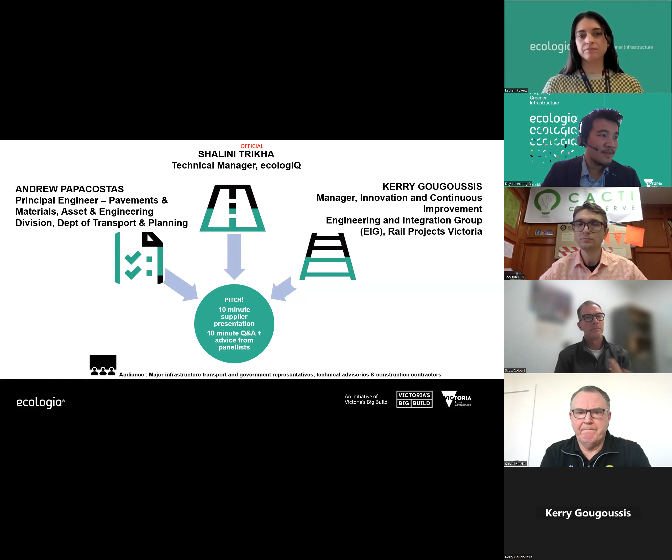Just before we get into it, I do want to take you through a bit of a whirlwind introduction to why we do what we do at ecologiQ, and it is because we're here to collaborate with you. I know out there in the audience I've got engineers, technical advisories, architects, people from local government, from transport projects, people from interstate departments as well. We see every opportunity, every project, every bit of road that gets built, every rail infrastructure that gets delivered as an opportunity and a catalyst for change. So we're here to work with you.

We've brought here today our industry and supply chain manufacturers, but with any asset owners out there, projects in delivery or in procurement or in design, we're here to partner with you and really challenge how construction is done so that we can bring about new innovation and new business as usual when it comes to building greener.

Some of the things that are possible have come through the showcase before. We've had a social enterprise called OC Connections manufacture Australia's first 100% recycled temporary T-top bollard. These you'll see on roadsides and at events providing traffic management. So you've now got a locally Australian, Victorian made bollard that's made from old bollards. They're quite price competitive. The feedback we're getting from procurement is that this comes in starting at $10.95 per bollard, or discounts if you purchase in bulk. It actually comes in cheaper than the regular imports. So for me, a no-brainer if you need traffic management, that is what you should be using.

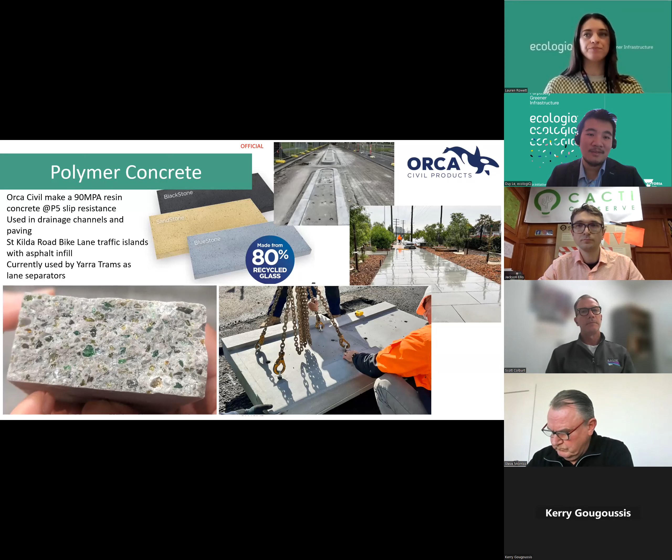We have high friction and high visibility surface treatments that not only provide safety benefits — you can see them in bike lanes and bus lanes — but also activate public spaces. So if you're around Melbourne and see a coloured, glinting glass surface on the floor, there's a high chance it's a product made by OmniGrip.

More recently, we had Safe Roads present on their brand new T-lock rubber safety barricade, for high speed safety barriers on 100km+ roads. They found that adding 4% crumb rubber from end-of-life passenger tyres to those barriers actually reduces the amount of debris spread in the case of any accidents. It's currently going through the final stages of approval but will be imminently approved and available. These barriers pack away a lot of tyres, one of our most persistent waste streams.

Going into the more innovative space, in New South Wales the UNSW microfactory has made a replacement ceramic terrazzo floor and wall tile made from textiles and glass, being used by hospitals and train stations in New South Wales. We'd love to see it here in Victoria.

Next month we'll have RESIN8, a new company setting up shop here in Victoria that creates plastic aggregates from all types of soft plastic and other plastic waste streams. This can be used in non-structural concrete under today's standards and specs. So again, we're seeing the market for recycled aggregates really heat up.

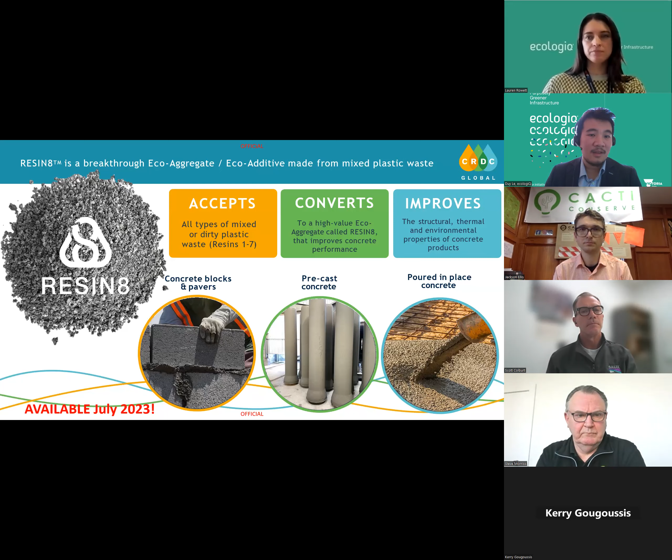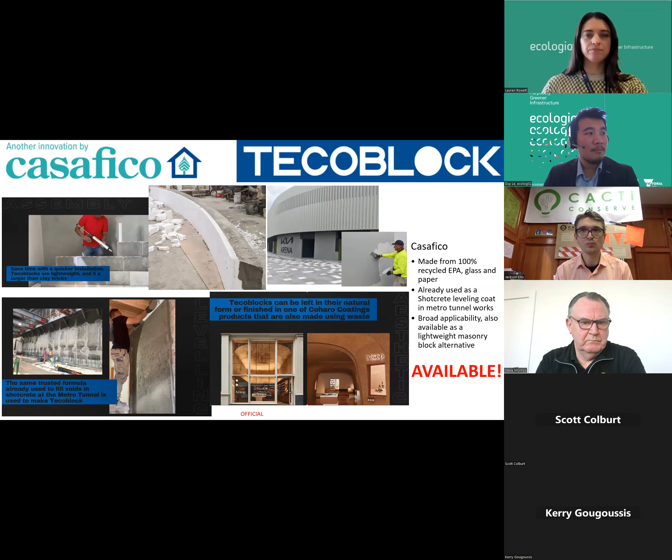For the built environment, there are businesses like Casafico that use really hard to recycle things like polystyrene waste, paper, and glass to manufacture building materials. That includes a leveling coat used in the Melbourne Metro Tunnel projects to smooth shotcrete, and to give interesting finishes like the Aesop shops — if you've ever walked through an Aesop shop, that's actually Casafico coating on their walls. It's being used in sports stadiums, and the same material makes building blocks, infilled concrete blocks, retaining walls, and seating. Great stuff that's available here locally.

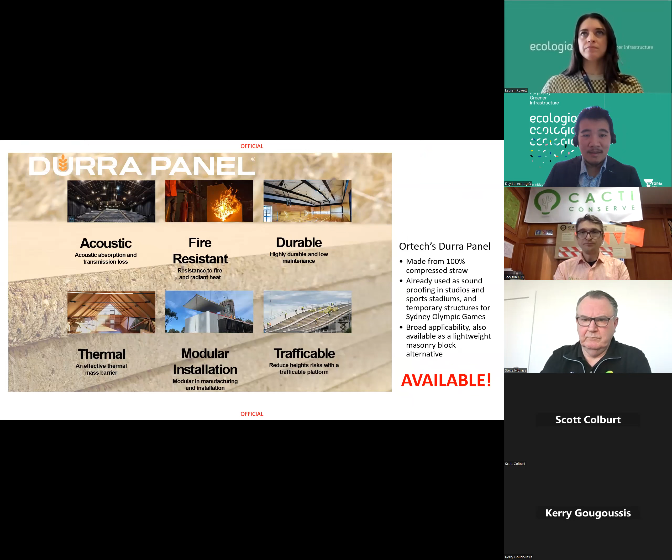Sometimes the best innovations are the most simple. Durra Panel by Ortech is simply compressed straw panels that can be used to insulate and soundproof buildings, and has been used at the Docklands, Sydney Olympic Games, and other major sports and entertainment stadiums across Victoria.

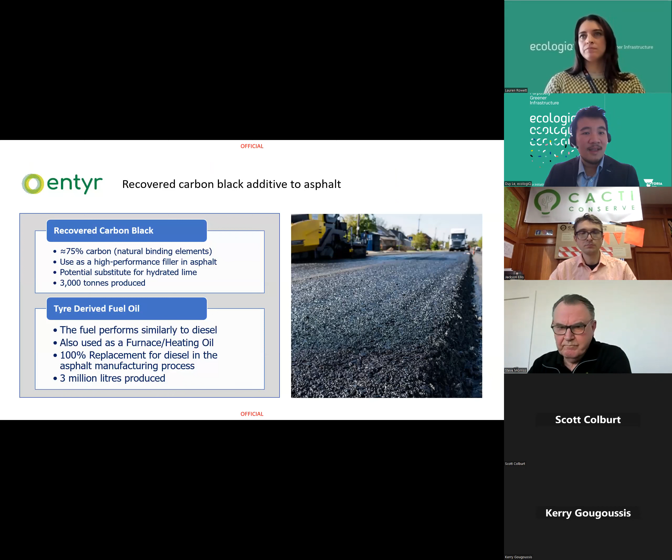And lastly, we had Entyr come and present at the showcase last year, using recovered carbon black from end-of-life tyres as a filler in asphalt.

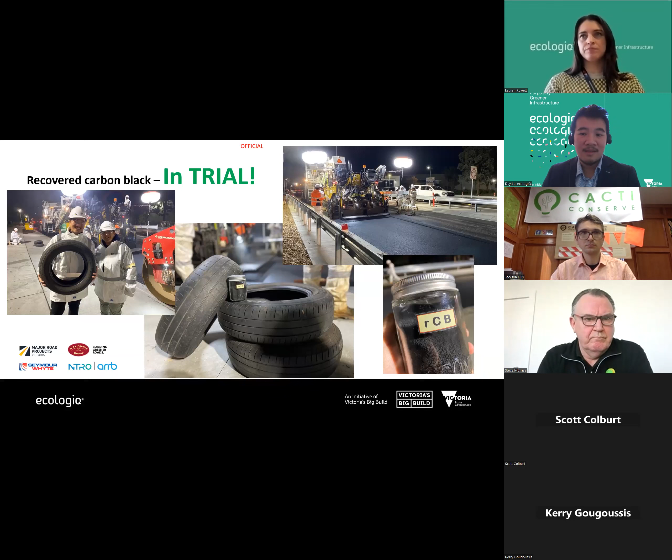We're happy to report that a few weeks ago, Shalini and myself were out to observe the trial of this material going into the ground in Victoria. So if this performs as we expect over the next couple of years, this will be coming to the marketplace soon.

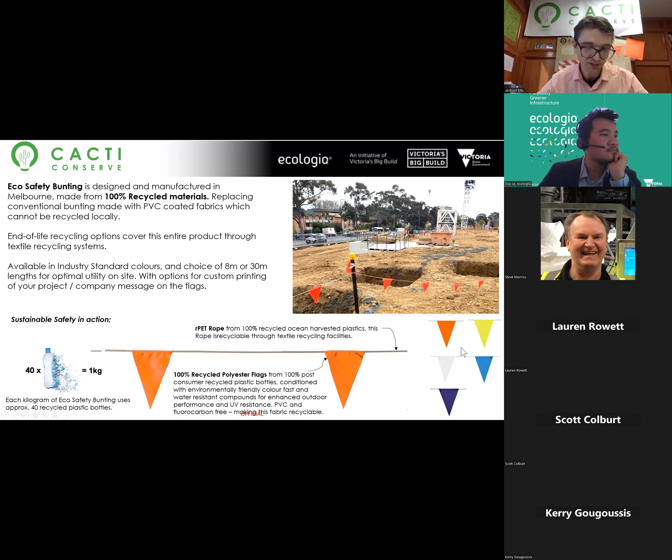This product comprises an rPET rope from 100% recycled ocean harvested plastics, with recycled polyester flags made from 100% post-consumer plastics, conditioned with environmentally friendly colour-fast, water-resistant compounds to enhance outdoor performance and UV resistance. This product contains approximately 40 plastic bottles per 1 kilogram of bunting.

Our eco traffic flags are designed and manufactured in Melbourne from 100% recycled materials, again replacing conventional flags made from PVC coated fabrics which cannot be recycled locally. Available in a range of industry standard styles with option for custom printing for project and company messages on the flags. End-of-life recycling options cover this product through textiles recycling systems.

These flags are made from the same woven polyester derived from 100% post-consumer plastics, outdoor ready with colour fast and UV resistance, on the back of a locally sourced building salvaged hardwood timber pole. We've received positive feedback from our traffic management clients that the hardwood poles are much more durable than the lightweight timber used in the imported flags, which frequently break in use and handling, extending the product life and further reducing waste.

Our eco post systems provide a sustainable and safe alternative to steel star pickets used in barrier support and site segregation. Cacti Conserve's eco post system utilises market-ready recycled plastics with project or client specified modifications for any application. Using fencing posts manufactured by Plastic Forests, an organisation in Albury Wodonga, these posts are made from 100% recycled plastics from local agriculture waste with a mineral blend to increase strength, providing a range of pickets with pointed ends and droppers with square ends designed to replace conventional steel star pickets.

So this is what I would coin a next generation composite sleeper. Plastics and composite sleepers have been around for a while, however, I think this is certainly cutting edge. It's not Salix's technology, we've licensed it and have exclusive rights for Australia and New Zealand, but it was developed by a couple of smart Germans based on a specific need by the rail authority in Germany to develop a high-performing, sustainable sleeper product, and this is the end result.

This was done back in 2015 and has since been widely used around Europe. It's a fully circular product with very strong environmental and sustainable credentials. Carbon footprint reduction is quite significant compared to conventional cement concrete sleepers, with significant savings in landfill too. Highly durable, designed for 50 years, and from a performance perspective it's a high performing product with very good mechanical strength, tested to and used in applications at quite high speeds and heavy axle loads. It's a durable, low maintenance product, and as a result a low life cycle cost product.

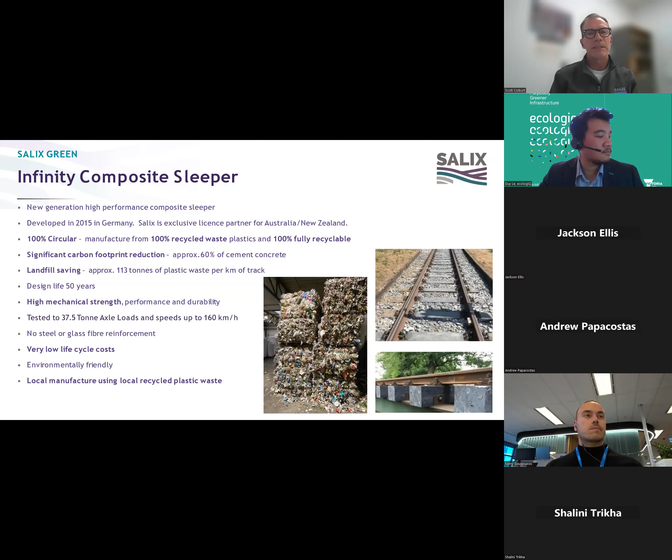We are planning for local manufacture in Australia. Current location is to be determined, but the plan is that we'll be manufacturing here locally and using local recycled plastic.

This sleeper, because of its strong mechanical performance characteristics, can be widely used across lots of applications in track - mainline, passenger metro urban areas, also widely used in heavy haul and freight applications up to axle loads of 37.5 tonnes. Used a lot in turnout switches and crossing applications where there's significant heavy load bearing, and the lightweight nature of it, coupled with its strong flexural strength, has lent itself to be used in bridge applications as well. It's also been used in light rail embedded track applications around Europe to date.

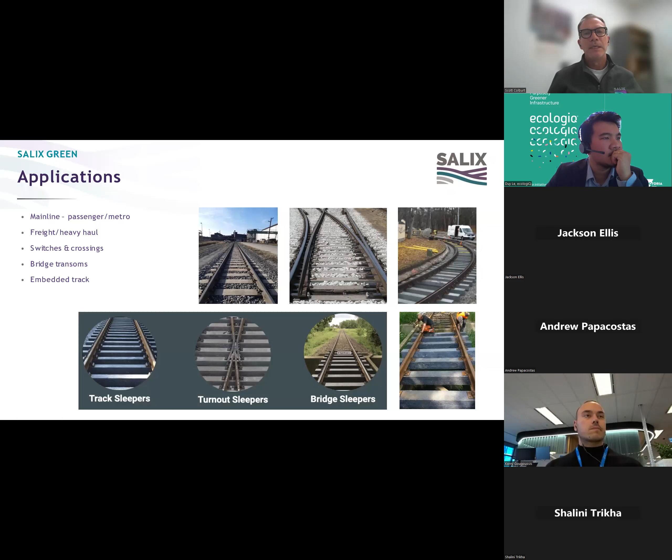One of the real advantages and unique features of this composite sleeper is the fact that it's customizable - to different cross sections and dimensions, and also different performance requirements to meet specific customer requirements. Notwithstanding that, we have 3 standard models available based on varying levels of performance. Within that standard range, we have 2 standard cross-section dimensions: 260 wide by 160 high and 230 wide by 180 high. We also do a deeper bearer, which can be used for bridge applications as well. We can manufacture this in lengths up to 5.3 metres long, and through a specialised joining system, can join together a couple of lengths to make longer bearers, particularly relevant to turnout applications.

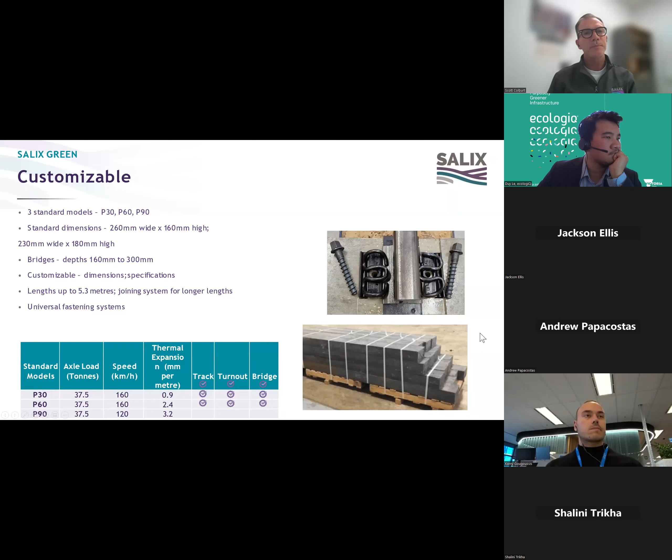It has universal fastening system applications. So for those in rail, E-clip, fast clip, W-clip, it's quite universal in terms of the fixing systems that can be used.

From a manufacturing perspective, we are using, in the main, post-consumer waste soft plastics, mainly HDPE, LDPE and LLDPE, and we essentially take it in its worst possible form - contaminated - and we can process that into a usable form to produce a high quality, high performing sleeper.

The manufacturing process we use is quite unique. It's lower energy, done under cooler temperatures, and we compound the recycled plastics we've processed with some natural fibres, which give it its flexural strength. As a result, we don't need to put any additional stiffening into the sleeper - no fiberglass, no pre-stressed steel reinforcement. So we have a high quality, high performing product without doing that.

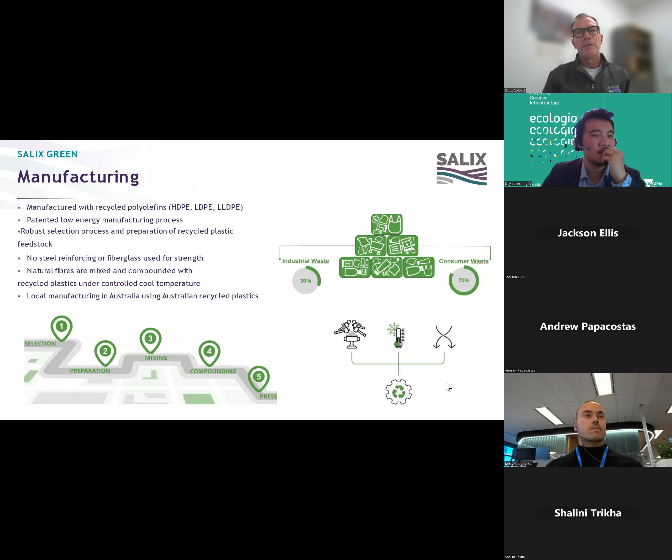As I said, we'll be manufacturing these sleepers locally. The plant we've designed is a high capacity, high output plant. One line can produce 120,000 sleepers per year, and we have the capacity to at least triple those volumes.

The big advantages or benefits of this product is really the sustainability aspect, as a result of its manufacturing process. The embodied carbon is significantly reduced compared to traditional sleepers - concrete, steel, and some other plastics. It's a 60+% saving compared to cement concrete sleepers widely used today. From a landfill savings perspective, we're talking around 113 tonnes of plastic waste saved per kilometre of track laid with the composite sleepers. From an environmental perspective, it's a non-toxic and non-leaching product.

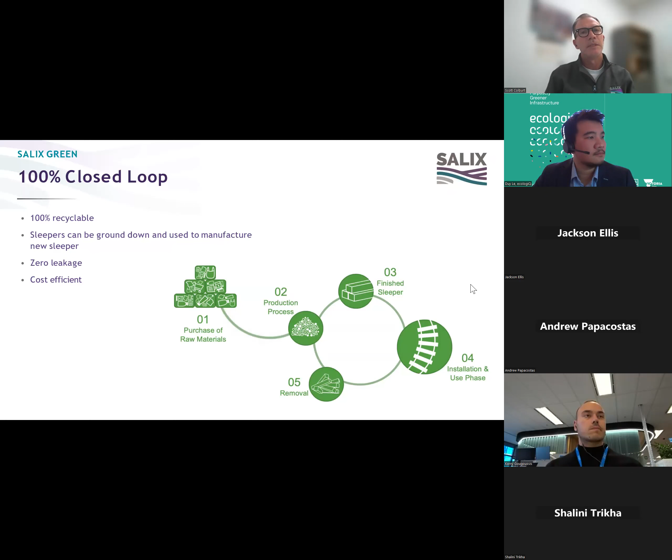This is a 100% closed loop product. We use, as I said, post-consumer waste mainly, with some industrial waste. And with our plant, we can actually grind down a sleeper that's end of life and use that to produce a new generation sleeper. There is zero leakage in that process, so it can be done infinitely. It's a very value cost efficient solution for the track.

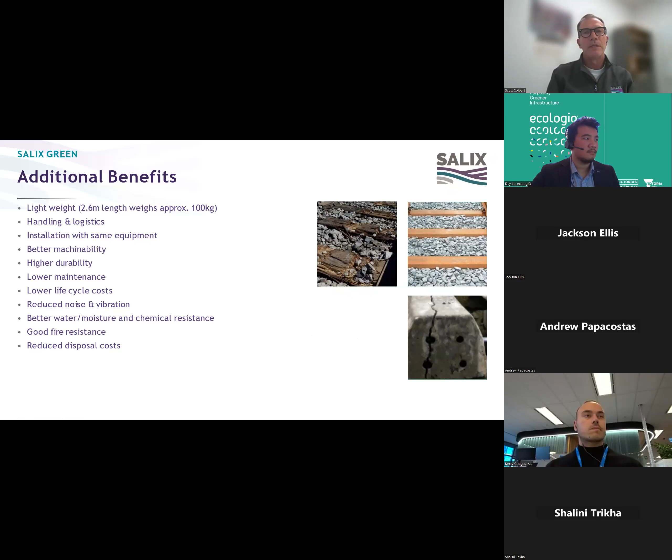It's a safe product to handle. The durability is better than concrete, timber and steel sleepers. Its performance in terms of water, moisture and chemical resistance is very, very high, and that all enhances the durability of the product. High noise and vibration performance of the product compared to other traditional sleepers. Fire resistance is also high. Disposal costs of the sleeper are lower compared to concrete, timber and steel sleepers. So overall, it's a lower life cycle cost solution. Next slide.

This product's tried and tested. Initially, all the testing was done at a reputable transport testing facility in Munich that does most of the testing for railway infrastructure products across Europe. It's received Deutsche Bahn approval, and also by the German Federal Railways, and subsequent to that, it has received European interoperability across European markets where it's been widely used to date. All the testing done on the product has been to European, ISO, and also US AREMA standards. The alignment of that testing very much lines up with Australian standard requirements, and we're very comfortable that all those boxes from an Australian standard perspective have been ticked.

The mechanical performance, the elasticity, the durability are all very high in this product, and it has been tested dynamically over longer periods of time in temperatures up to 60 degrees. So we're quite comfortable that it'll perform in Australian conditions. We are currently looking at a number of trial applications throughout the country at the moment, and have just started type approval processes.

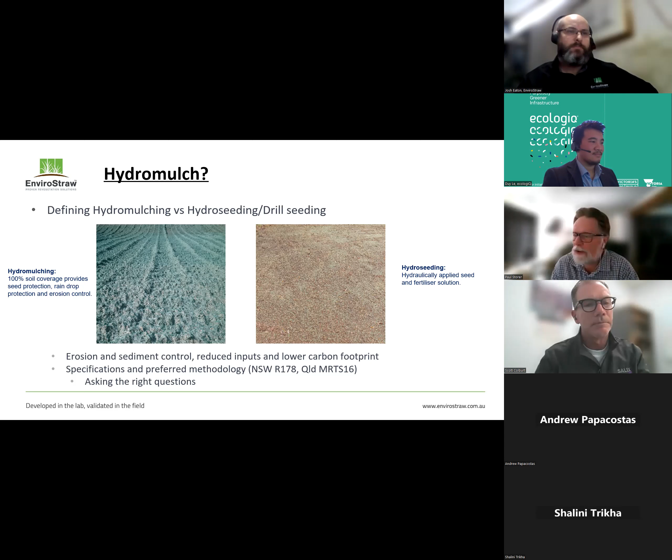What I want to do is very quickly give you a basic overview of our next generation, what we call all-in-one bag hydromulch technologies. Basically, these are derived from recycled and repurposed Australian waste stream inputs, and we manufacture at Yarrawonga in Victoria. Basically, we've been developing this technology over the last 20 years, and it's been implemented in both roading and mine site rehabilitation, agricultural, soil restoration, and so on over the last 10 years.

So it's fairly well established, and it's all about ultimately outcome. The whole thing about this EnviroStraw technology is it's more than just a hydromulch. Basically, within the one bag system, we include all sorts of things that are required to enhance soil health and water use efficiency. And ultimately, that's by improving soil fertility, increasing beneficial microbial activity within the soil. And this microbial activity leads to improved soil carbon, and the relevance of that become obvious in a little while.

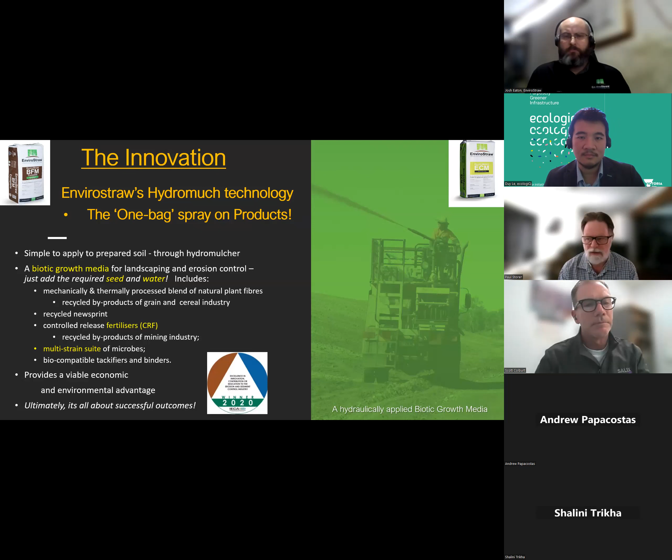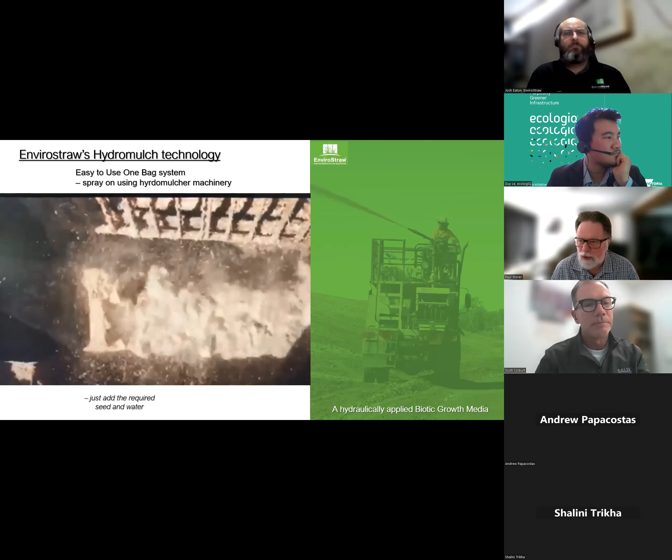Next slide, please. I just note there's 3 minutes left, Paul. So okay, so if you want to just play the video, basically, as you can see, the one bag system is dropped into hydromulch system. You add water, you add seed, you spray it out. Next, thanks.

In terms of the science of the system, ultimately what we're doing is creating living soils. We've moved beyond just the physical and chemical aspects of soil into the biological aspects. This is where we're kicking real goals, using insoluble mineral nutrients that don't leach into the environment so that they're river safe.

We use beneficial microbes that use those nutrients and pass them on to the germinating plant, creating resilience within the growing system. From that system, the microbes grow organic carbon, and by generating the carbon, we build strength and structure into the soil.

The organic carbon acts as a water sponge that holds onto moisture. So apart from flooding times, 90% of the time in reconstruction and roading projects, mine site rehabilitation, it's a waterless system relying on what comes from the sky. And so water use efficiency increases.

Ultimately, by using this system, we get improved soil health, improved vegetative cover, and that leads to reduced erosion, and obviously economic and environmental sustainability. Next slide, thanks.

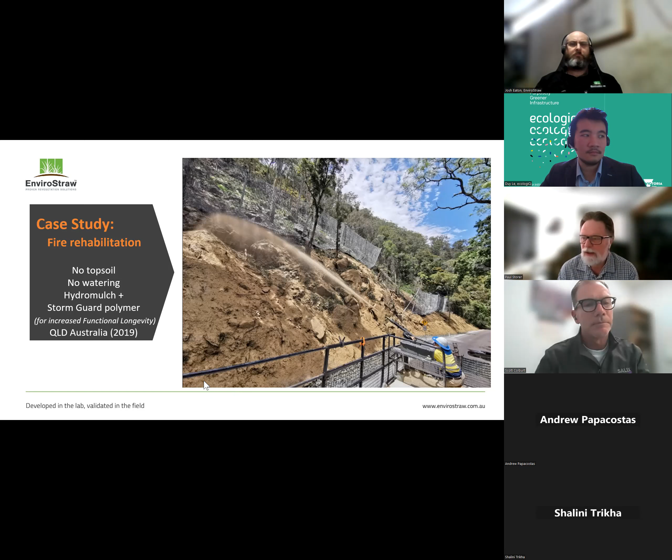This is showing a roading project, post-fire rehabilitation in Queensland in 2019. Basically, hydromulch with the microbes and minerals and so on was sprayed on with the seed. It's a no-watering system given the proximity. The hydromulch and the Storm Guard polymer were used for increased functional longevity. Next slide.

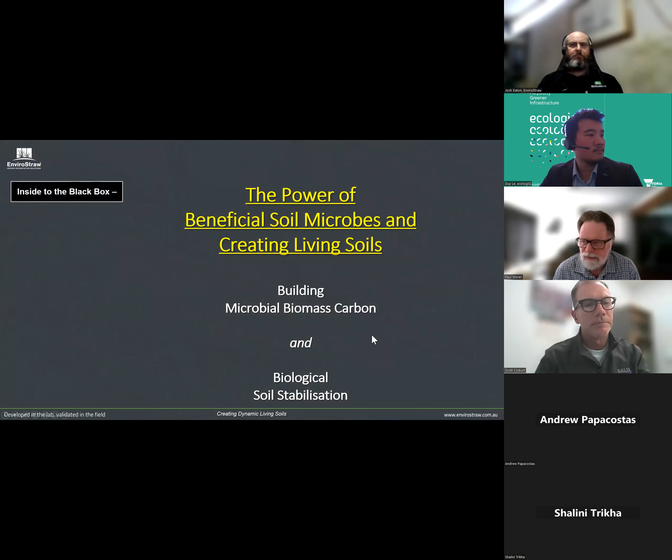I think if we can just take it down to the video, the next one, I think. I'll just use this as a finishing statement. Basically, this is the technology we're using.

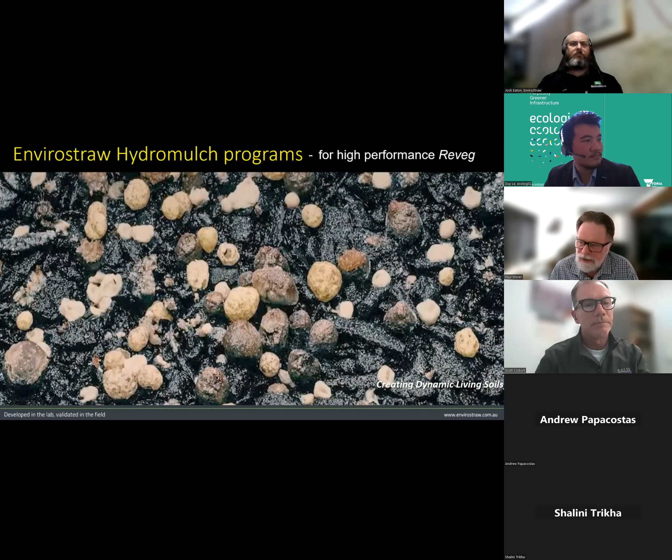Here we have mineral fertilizers, controlled release, and across the surface you can see this slime-looking stuff growing. That's the bacteria, and we can see the fungal hyphae growing. This is our microbial technology slowly eating those fertilizers, and this is where we get the controlled release.

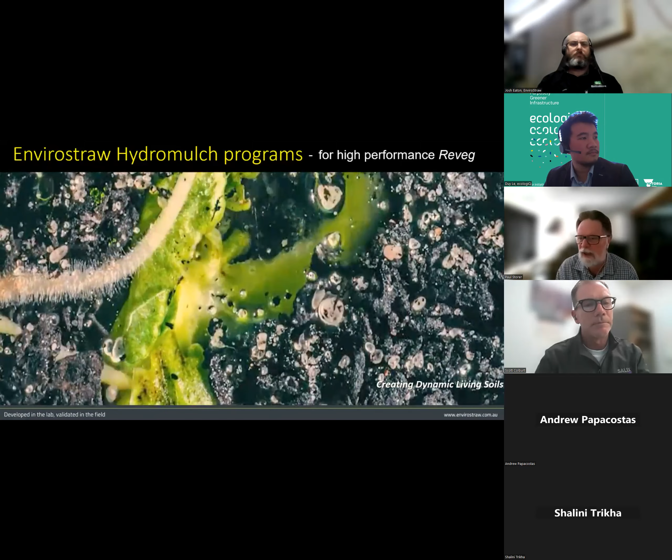We then build organic carbon within the soil, and that holds onto moisture, so we end up with a fairly wet system in the ground. We end up with resilient plant growth, and you can see the root systems with those fine hairs - that's where things like our mycorrhizal fungi attach and start pulling nutrients into the plant.

The take-home message I want you to get is that we're developing a dynamic living system. As you see the seeds germinating and punching up through the hydromulch, you can actually see we're dealing with a living soil. Soil isn't a static dead medium, it's actually a living one. By using our technology, we're creating systems where the biological, chemical and physical pull together, and we end up with a dynamic living system.

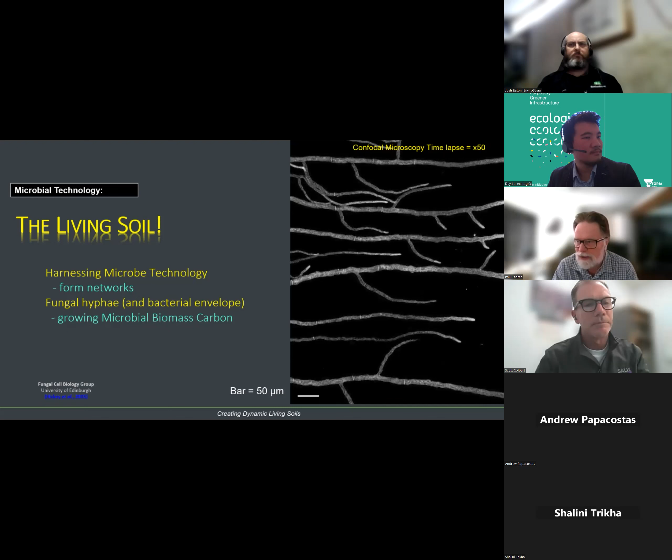So all I can do is encourage you to look at using EnviroStraw's innovative technologies in your projects for efficient carbon sequestration. And this microbiology is just showing the mycorrhizal growing.

If we then move forward 3 or 4 slides. Doy, keep going, just here.

Basically, the take-home message is that we're trying to create living dynamic systems, and if we can do that within the soil, we have a highly sustainable system that's based on a very simple to apply hydromulch system.

I think we'll hand it over for questions.

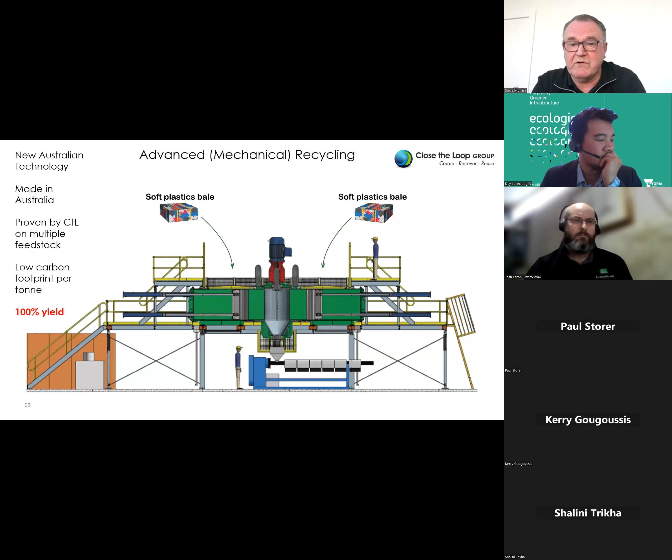Again, the material is melted, drops into a twin screw extruder, where further compounding takes place in order to meet the strict requirements of getting these products into roads. Thanks, Doy.

The model is to duplicate this plant and manufacture TonerPlas in many geographies around the country, eventually, starting with the first one in Victoria. The reason for that is we want to be creating local jobs where the waste is generated.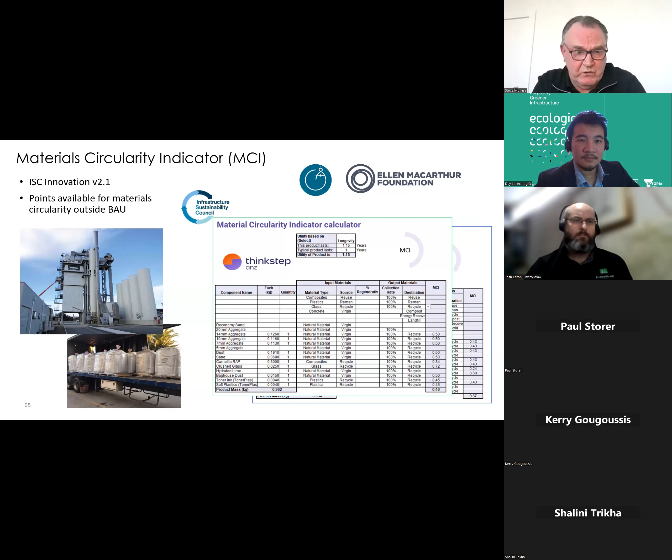A really interesting piece here. We've embarked on some work with ThinkStep ANZ, measuring the material circularity of TonerPlas in an asphalt road. Our initial work has shown we can get a significant improvement in material circularity outcome, which makes available to us and our partners, the contractors and asphalt companies, the ISC innovation points. Happy to talk to anybody about that. It's early days for us, but I think it's a trend that is coming, and I'm happy to introduce anybody to the concept of material circularity.